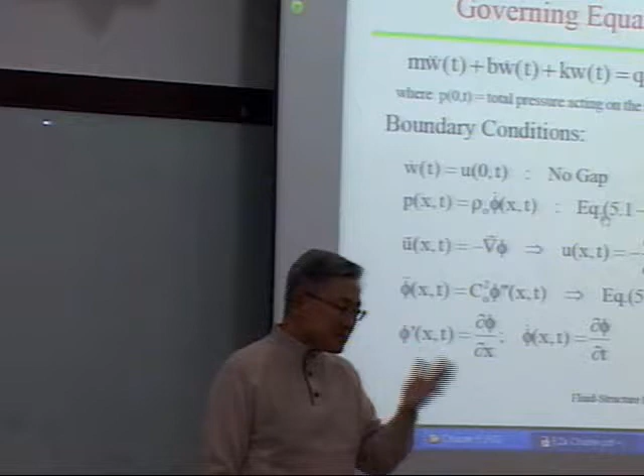Infinite plate, generalized infinite plate. I want you to understand this, to understand a really good concept of fluid-structure interactions. So then today I will of course assign the water situation, and then I will do the generalized spherical shell problem. I want you to get the feel of it, because the spherical shell problem is a lot more difficult in math, but it's very much doable. It's a lot of math operations you have to do, but we can really go through all the way to the end. And when you return, I want you to sit down and really drill through. My notes are so detailed, so you need to really go through and check it out. Okay? If I finish that today, I think that's good.

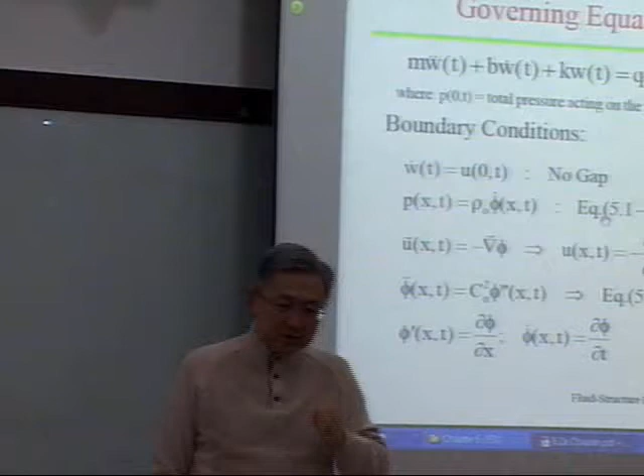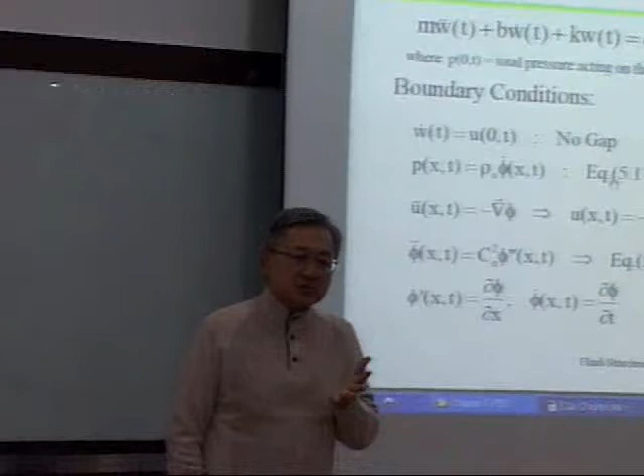And Wednesday, I'm going to give you the so-called general DAA1, which means first order doubly asymptotic approximation. What does it do? What is it good for? What would the application be? What has been done in the past using DAA1 or DAA2? What's the trend at present? What direction must we go? Things like that, to perform underwater vehicle analysis subjected to shock situations. Okay? So then you will catch what's going on. Computing capabilities are moving so fast, unbelievably fast, and everything is changing, and computational schemes are changing. You have to get along with that. You can't stick to the old scheme.

Then, of course, this week, maybe starting Wednesday or Friday morning, I'm going to start looking into chapter 7, which is shock qualification of shipboard equipment, to look into detail how to handle shipboard equipment against the shock. Very important. There are two different kinds you have to understand. One is the structural dynamics problem for the whole ship system, how the ship structure could get affected by the underwater shock. And the second stage is, the idea nowadays is not to kill the ship.

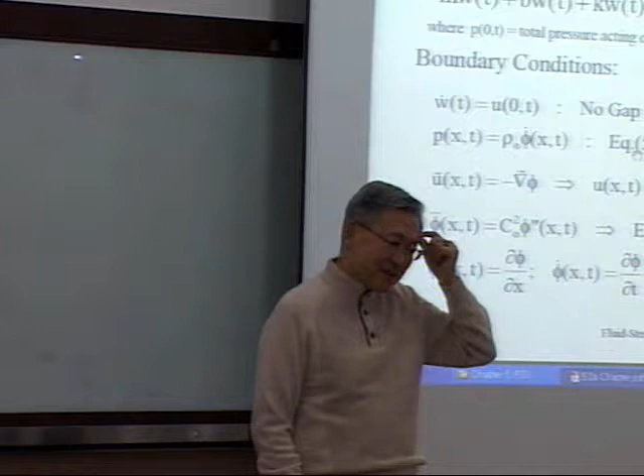For the shipboard equipment, you have to know one approach, which is called DDAM, Dynamic Design Analysis Method. That's the way U.S. naval technology has employed since the 1960s. It's time to update, and we are doing it, because transient computational analysis is one of those. But for simplicity, DDAM is the way they really check whether the shipboard equipment is going to survive or not. You see, the name is interesting. Simple calculations. Not making a million degrees of freedom system.

So Willis, when you go back to the Singapore Navy, if they try to make a 1,000,000 degrees of freedom model for shipboard equipment, what are you supposed to say? That's no good. DDAM is not intended to solve a 1,000,000 degrees of freedom system. Maybe up to 100 degrees of freedom system. And I want you to get the idea.

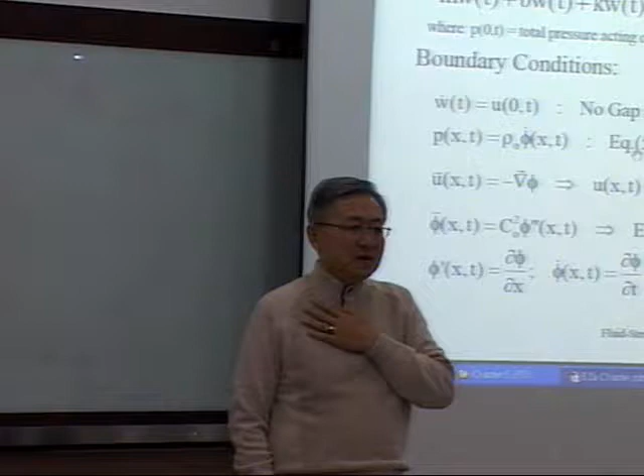This idea I learned since I was young, like yourself, to make a more perfect model. I really made a detailed model. I was involved, at the age of 30, in nuclear power plant design, the whole design including reactor, steam generator, whatsoever. The model was good, I checked it out. Then I put it in the computer Friday and went home. That's a year before you were born, 1973. It kept running and running. Of course, computers were slow at that time.

Monday morning, when I came back to work, oh my gosh, they were looking for me, and they killed my job because it didn't finish. It kept running like forever. At 8 o'clock in the morning, all the other programs had to run, so they killed my job. They didn't fire me. They could have, because I spent 2.5 days of computer time. I was lucky not to be fired. That slow.

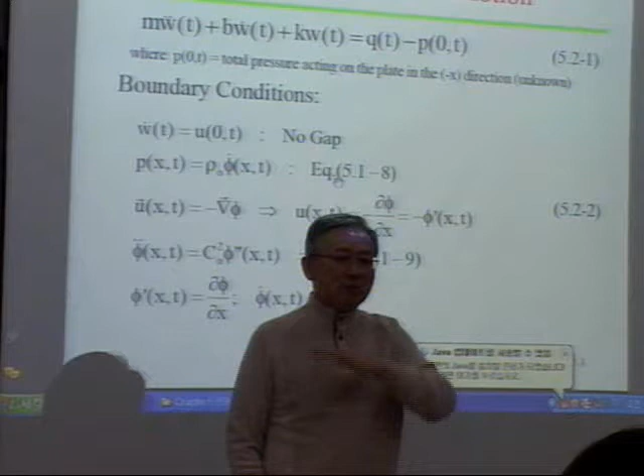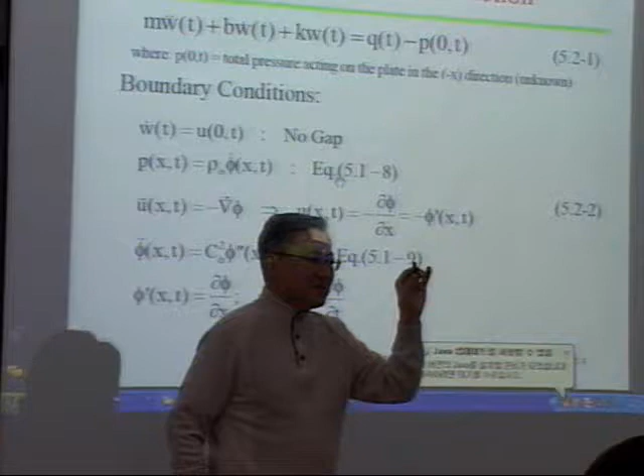Nowadays computer capability is so fast. Still people complain, I need 1 terabyte storage. You know how much 1 terabyte is? 1,000 gigabytes. Gosh, it's unimaginable. In '85, when IBM first put out the PC, after the Apple, what I had, including memory, hard disk, everything, was 200 megabytes. That was a gigantic storage. Now, this piece holds 4 gigabytes. So we are living in this era.

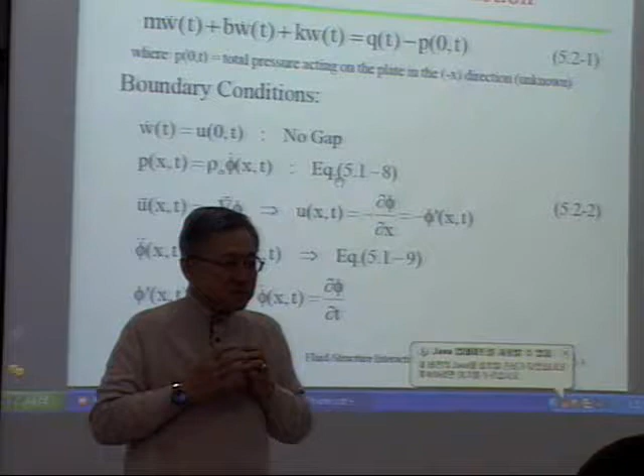It's scary. So I want you to think big, always looking forward, and set your dreams, and create your own virtual space. And I want you to work on it with gusto, right? And when you go back to your country, dream. You have to make it come true. Think big, not small. That's the usual stuff.

Okay, so this equation set, we all did this, and here is one, I'm going to be right over here because I moved all the way to the end. Okay. So U is equal to minus dΦ over dX. This is the basic definition of the velocity potential.

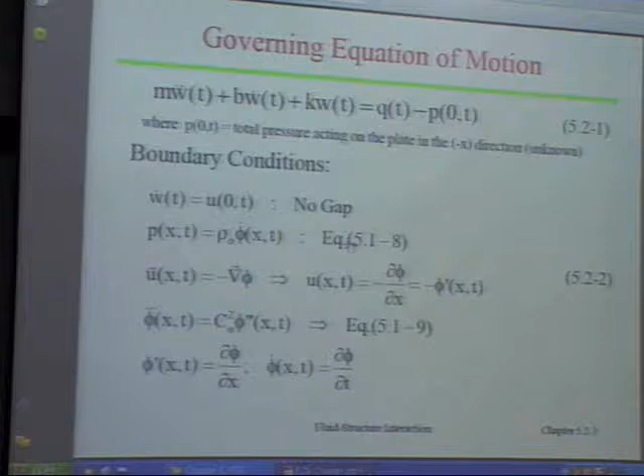And P of X, T is equal to rho naught times Φ dot of X, T. And Φ double dot of X, T is equal to C naught squared Φ double prime. Of course, this is the same form as the wave equation. That's one of the three most important things: governing equations, initial condition we did, and boundary condition.

Boundary pressure means pressure at the surface of the plate, which is Pi, incident shock wave pressure, plus PS, scattering wave pressure. Scattering wave pressure includes the reflection wave plus the pressure due to the motion of the plate. In the solution phase, we use a wave propagation solution. Φ is equal to Φi plus Φs. Φi is the incident wave velocity potential, Φs the scattering wave velocity potential. Now this is important: in the defining process, Φi is equal to psi L, which is from the defense department. I don't know why they always.

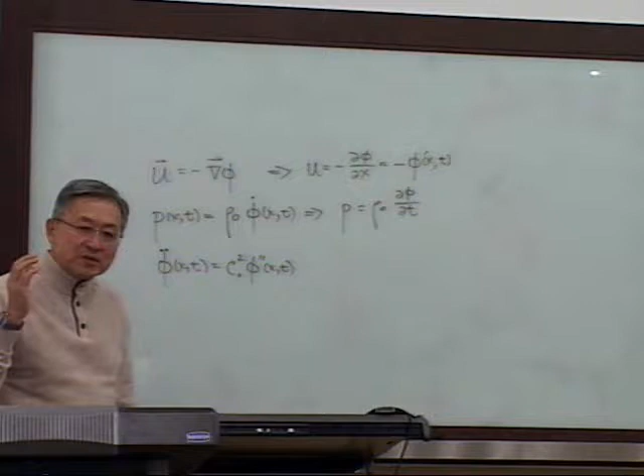Okay, so don't forget. Psi L means the wave is moving in what direction? Opposite to the positive x-axis, right? Yes or no? Yes, because the sign is a plus sign there. So plus sign right here. If it's a negative sign, then the wave moves in the same direction as the positive x direction in chapter 2, and plus means the opposite direction.

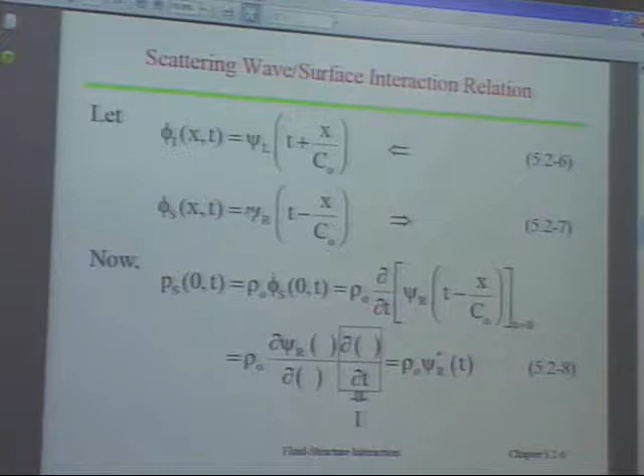So this is to the left. Left in this case is the negative x direction, right? So that's where the shock wave comes through, the negative direction, and this is to the right, which means it's like a scattering wave after reflections, things like that. So if you look carefully, as I explained already, it's straightforward using these 3 basic principles.

So scattering wave pressure at x equal to 0, what does it mean? Right on the face of the plate, right? So this is really the boundary pressure. After that, you just put this in, as we derived before, then substitute the arbitrary psi functions right in there. So what direction does this scattering wave move? To the right. So to the right is this expression, which is psi R. After that, you use a chain rule, then you get that.

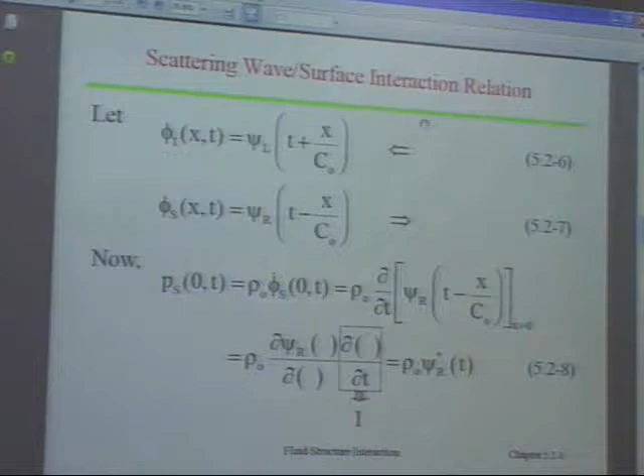So it's very similar. The scattering wave pressure or incident wave pressure is all the same approach, whether it's the generalized infinite plate or the spherical shell problem. I want you to still go through it when you return to your office. And now it's the scattering wave at the plate surface, the interaction relation.

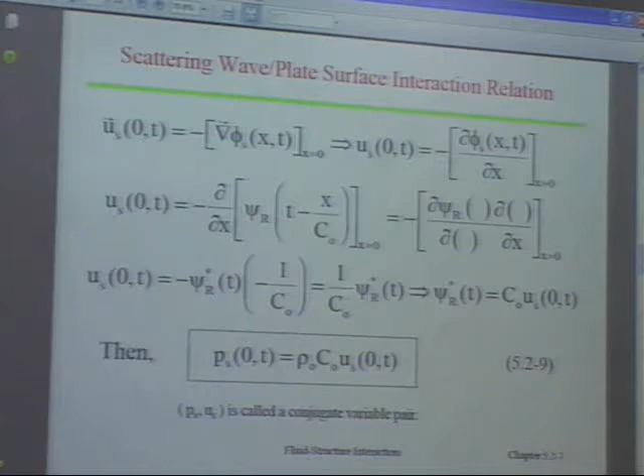So US is equal to this, which means US is minus del phi S over del x, right here. Right. And the same way, US is minus del over del x of psi R. This is to the right, of course. Then you just go through exactly the same way. Then once you find it, PS is rho naught C naught US. This is very logical. You didn't assume anything.

You didn't assume anything, but the usual problem with PS is the sign in front of it, whether it's positive or negative. But this makes sense. Using the infinite plate, you can tell very easily. This is the scattering wave pressure. It's moving to the right, right? So it's the same direction as US, which is the fluid particle velocity right behind the scattering wave pressure. So this is one equation you can tell.

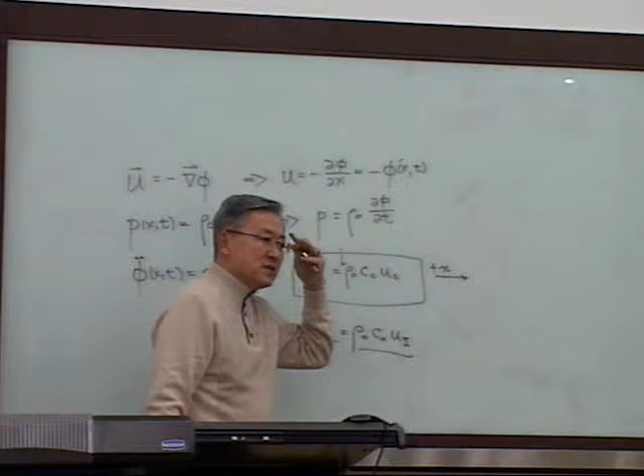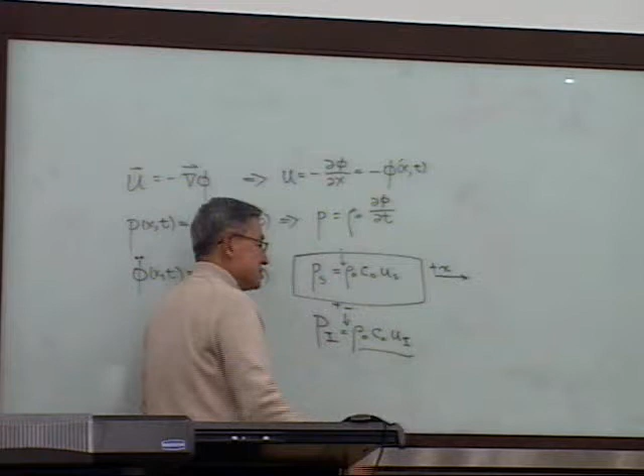By the same analogy, I can write PI is equal to rho naught C naught UI. We know this is a pressure. What about the sign? This is moving to the right, which is the positive x direction. This is just for analogy. So we know this, then my question is, of course we will really derive it, but can you tell whether it's positive or negative? You have a choice. 50% chance of winning.

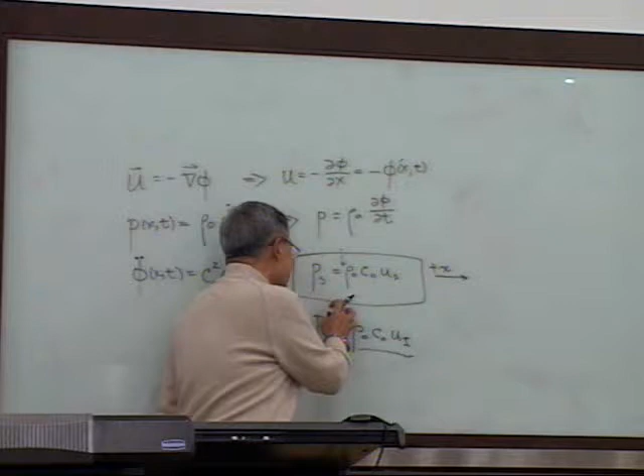This is going to be negative. Why? Because UI is the fluid particle velocity behind the incident shock wave, which is moving to the left. Left is the negative x direction, so I can tell right away by this analogy this is going to be negative. But of course, we're going to look at that. Got it?

So now the surface pressure, which means at x equal to 0, P is equal to PI plus PS. PI we know. The problem is PS, the scattering part we don't know, which is caused by the motion of the plate. So PS is rho C naught US right here. Now you substitute this into the equation of motion. You just plug this in here, where US is W dot minus UI. W is of course unknown. Okay. Then which is right here.

So rho naught C naught W dot moves to the left. You have this equation. And these two lines I spelled out; the derivation is on the next page. PI is rho naught phi I dot. We can tell because it's relevant to PI, which is right here. Then the expression for PI is to the left, so psi L comes into the picture.

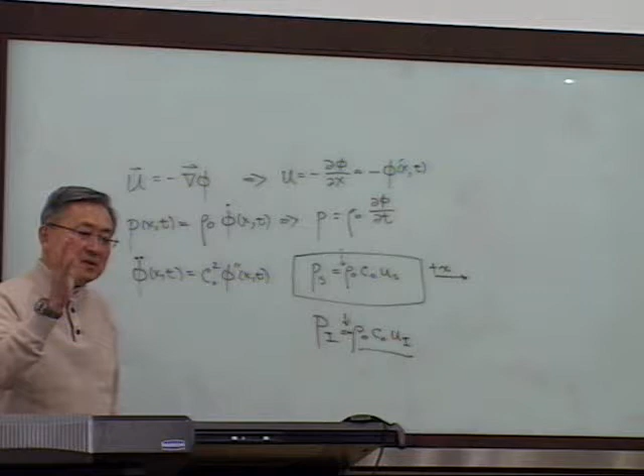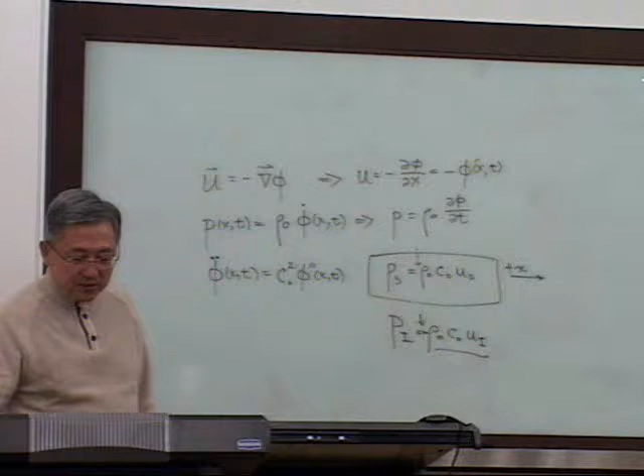If you plug in the psi L into here, this is time derivative, you end up having this. So psi L star is minus C naught times UI. Look at carefully here. Then if you plug in that expression right here, Pi is equal to rho naught C naught times UI. So it's a minus, right? Two lines, right? Psi L star is equal to minus C naught times UI. You plug in here, then Pi is equal to minus rho naught C naught UI.

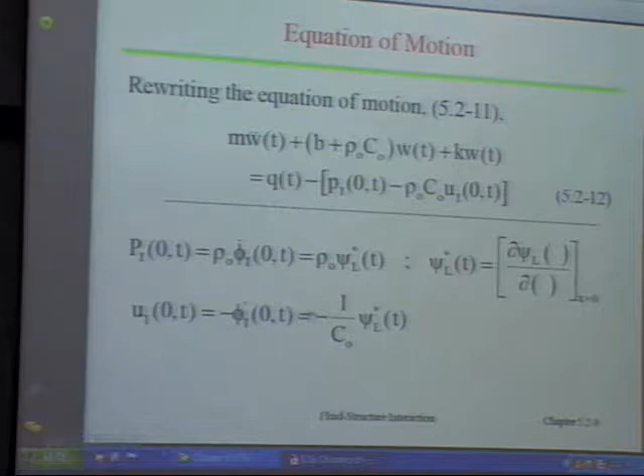Visualize. I really encourage you to visualize the equations. You can figure it out in your brain quickly and keep practicing, and it will help you tremendously. Then the derivation is coming right here. UI. It's just the same approach, nothing new. Then Pi is equal to minus rho naught C naught U. As we saw here, PS, Pi, without the derivation you can tell, because the approach is the same, the mathematics is the same.

Then equation 13, plug in equation 12 over here. Then you end up having, this is 2Pi. And the QT is what? That's internal pressure, right? Which is applied to the right, positive. This is a minus. Why? Because the Pi business is moving to the left. So it's a minus. Minus 2Pi.

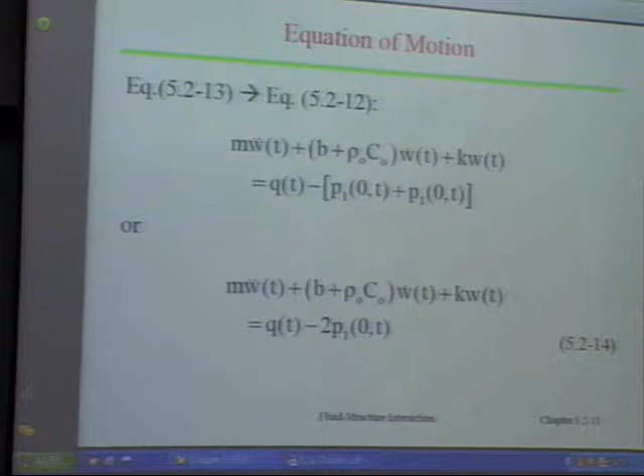So if there is no internal pressure, you drop the P. And in this case here, for your nomenclature, for positive x direction to the right, this is negative. So watch out always for the sign, positive and negative. Otherwise it's quite good.

This is going into the boundary pressure, and we'll look at the pressure component. This is at x is equal to 0. Then Pi plus PS. PI is the incident shock wave pressure, and PS is of course the scattering wave pressure. Scattering wave pressure has two components. One is the reflection wave, which is the same as PI, plus the PS, that's really the scattering part, which is really pressure caused by the motion of the plate, simply radiated by the plate.

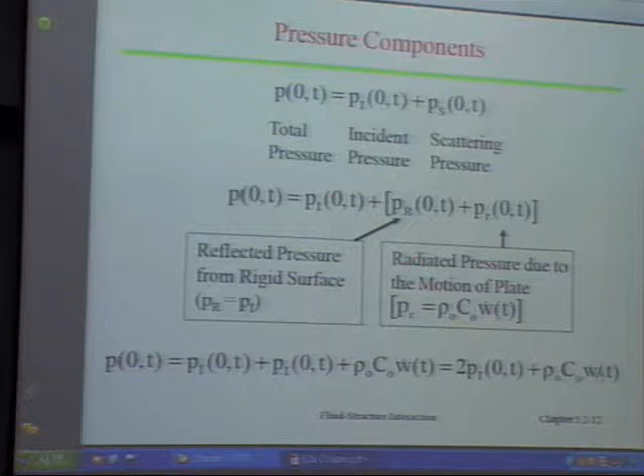So, which means rho naught, C naught, W dot. Then, if you plug in the equations of motion, you have this. What's going on? This is 2Pi, of course, and this is the radiated pressure, which is caused by the motion of the plate, so 2Pi plus this. Clear, isn't it? No confusion, very clear.

You have plate, water. You have incident shock wave. You have scattering shock wave. And you have transmitting shock wave. If it's air, you don't have a transmitting shock wave, right? Because it's air, the impedance difference is too much. So it's very small compared to water. You don't have to count anything transmitting into the air. This is what you should use. I want to see how you handle PT. That's the main thing. But you know the answer.

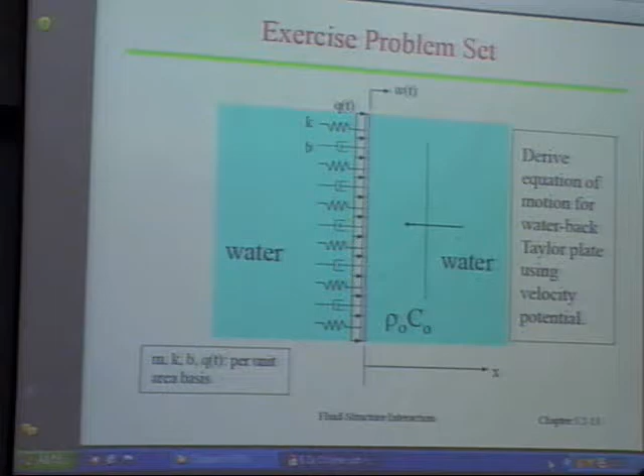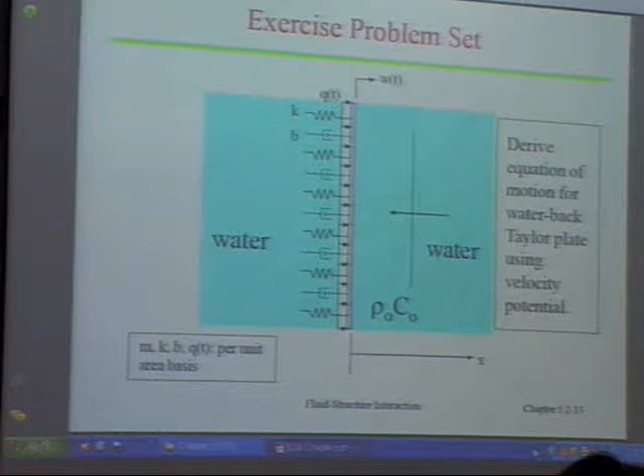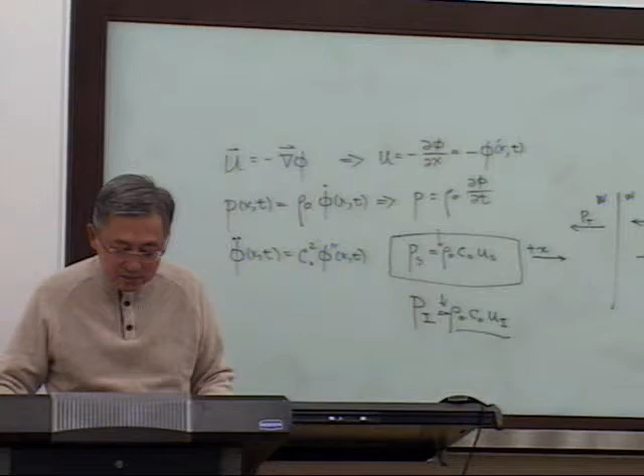Now the spherical shell wave. It's a sphere. You have air inside the spherical shell. It's like a soccer ball. It has a shell skin, and inside is air. So of course it has a weight there, the mass of the shell. When you drop it into the water, it could be neutralized at a certain depth in the water. Okay, then apply the shock situations.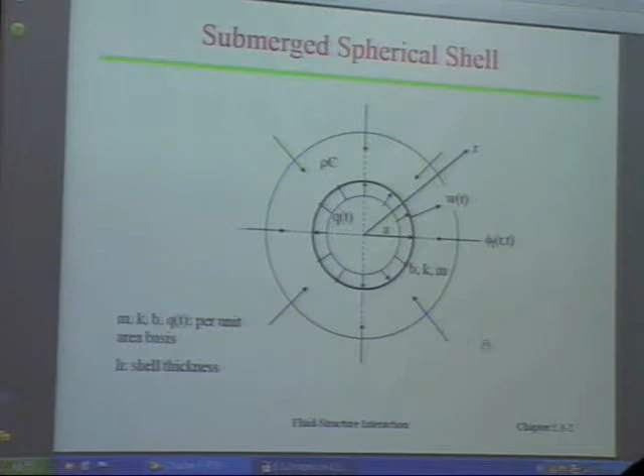And of course, what we are dealing with here is mass per unit area. You could think of the stiffness springs per unit area and damper per unit area, Q per unit area, things like that. Shell thickness you could define as H, like a uniform shell. Configuration is clear. And the equations of motion, as before, very clear. M W double dot, B W dot, K W, minus P(A, t) equal to Q.

Because the radius of the shell is concerned, to get the pressure right at the surface of the shell, we have to compute for R equal to A. A is the radius of the shell. So this is minus what? Incident shock wave pressure is converging to the center. Positive direction is in the radial, outward radial direction. So the direction of the PI is inward, right? This is minus. So now everything is all good.

This is a simple, similar equation to the infinite plate. So P(A, t) is the total pressure acting on the plate in the minus R direction. Of course, that's unknown. P is unknown because there is what part? Scattering part. That is there. That's unknown. Boundary condition. What does it mean, boundary condition? Right at the interface between the water and the shell, at R is equal to A.

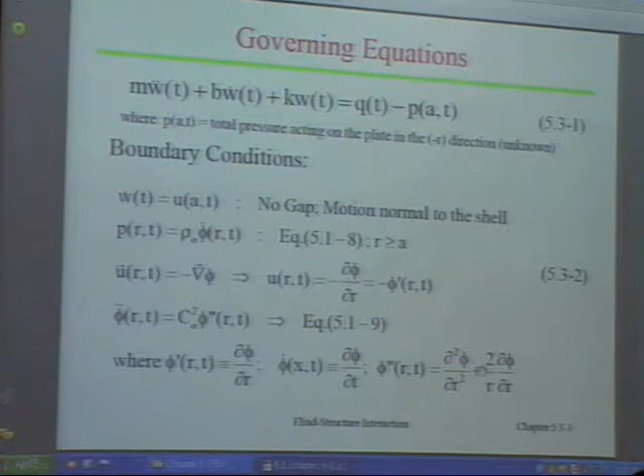No gaps. Motions are normal to the shell. Always when you have a curved shell, you're dealing with the component normal to the shell at any particular point. Normal component is what you are always looking at. So in this case, for the spherical shell, normal direction is always the radial direction. No gap assumption. All the equations derived through here, when cavitation occurs, the theory is no good. Cavitation occurs means there's a gap between the water and the shell.

But it opens due to the flexibility of the shell, then it closes right away. It doesn't stay long at all. Instantly closes. Whenever something closes, what happens? There is always a sharp pulse in general. Right? So yes. So no gap, but so close, you can just use it even for a local cavitation situation. If it stays long, you can't, but it's instant.

P is equal to rho naught phi dot. This phi dot is simply del phi over del t here. And this is the definition of the velocity potential. Very similar situation. Instead of x it is r. So spherical coordinates come into the picture. And the wave equation forms here. This is the differentiation with respect to time. But this is due to the differentiation with respect to r twice. Then it's spherical coordinates, it has two terms. Third and fourth terms are related to the other two coordinate axes, like theta and phi.

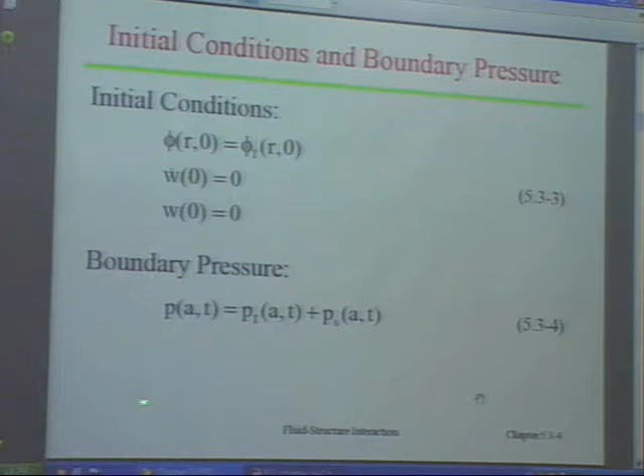Okay, boundary pressure. Boundary pressure means pressure right at the surface of the spherical shell, right? Pi, Ps, always the same. It's all symmetric. And now, this is the part. Identical process. This is the Pi. Let Phi be equal to 1 over R. Before, for the spherical wave, it was 1 over R times an arbitrary function F, right? Then in this case it is the incident shock wave, converging opposite to the positive R direction. So this sign has to be plus, right?

Yes. And this term was X over C before. But in this case, it's R over C minus A over C. Why? R should be greater than or equal to A. If R goes inside the shell, then that's not valid. So R has to be greater than or equal to A. If it's not, it has to come inside the sphere, which is of no interest at all. So this is the situation to avoid. R is greater than or equal to A.

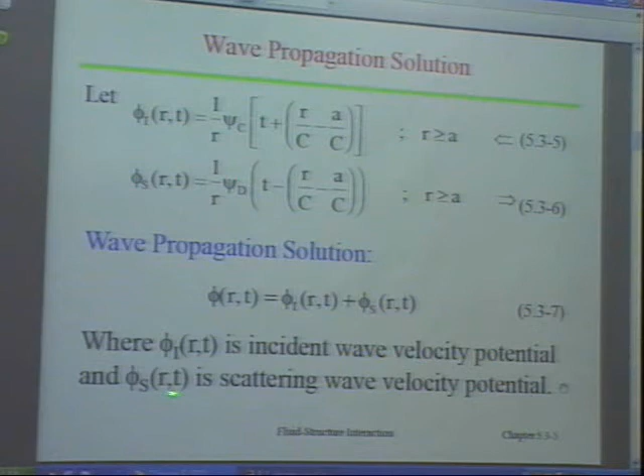I'm not going to bother to assign the homework problem. Inside the spherical shell is water, outside is water. You will do the generalized infinite plate; that's enough to capture all the essence of it. But this case is a little more complicated. So after you return, sit back and really read through the derivation as you please. Wave propagation solution. So Phi is the incident wave velocity potential. Same thing, Ps is the scattering wave velocity potential.

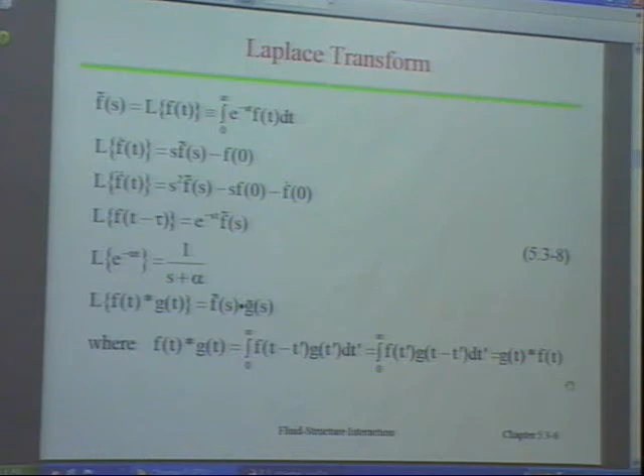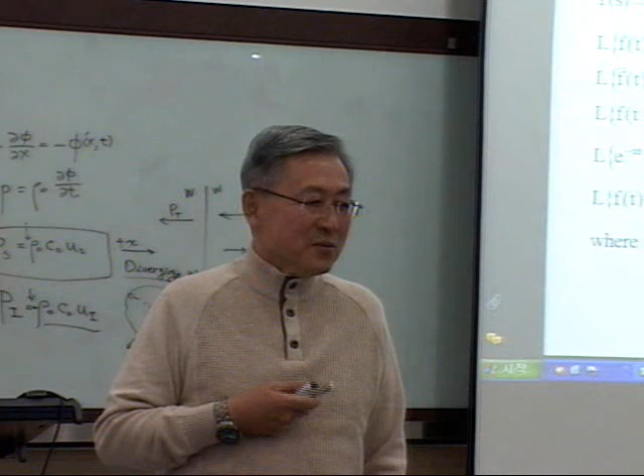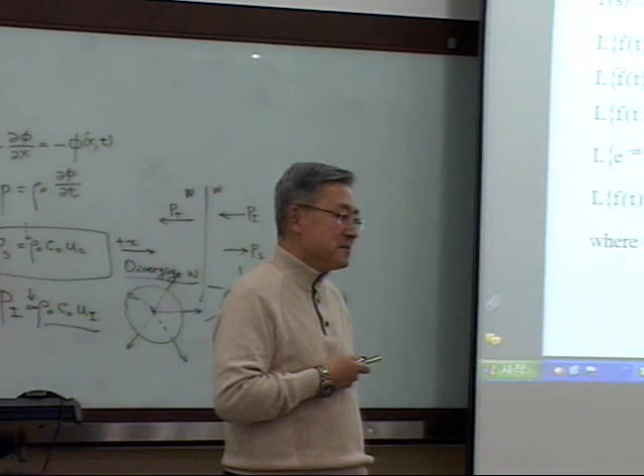We need to employ the Laplace transform. What's the purpose of using the Laplace transform? John, what's the purpose? No. What's the purpose of using the Laplace transform? Louder. Transfer domain, of course, from physical domain to Laplace domain. But when you employ the Laplace transform to solve the problem, it's not just for fun. So what's the purpose? No. Well, what's the purpose? We convert a differential equation to an algebraic equation to solve.

So for the vibration problem, we throw it into the Laplace domain. Why? Solving the differential equation is a lot more work. I throw it into the Laplace domain, then I can solve simply an algebraic equation in the Laplace domain and throw it back, taking the inverse Laplace transform to get the solution in physical space. Always when we have a transform, it has a reason.

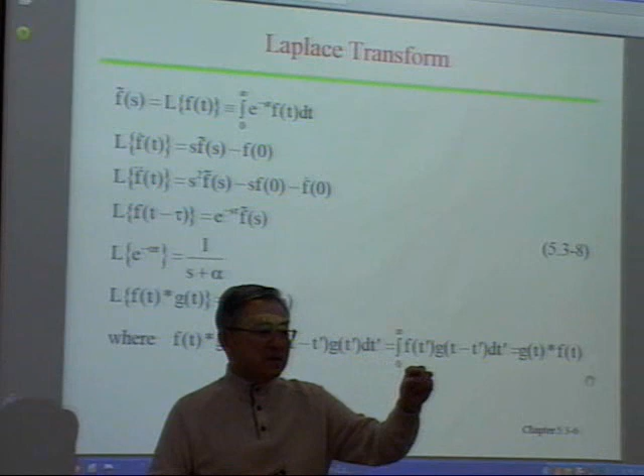That's why for the Laplace transform, there's even a big book which has all the Laplace transforms of given functions. I have one copy, I don't know whether I brought it to Korea or not. In the book, you look up the Laplace transform, so you don't have to derive all of that. Just look at the function, then look at the Laplace domain transform. Okay.